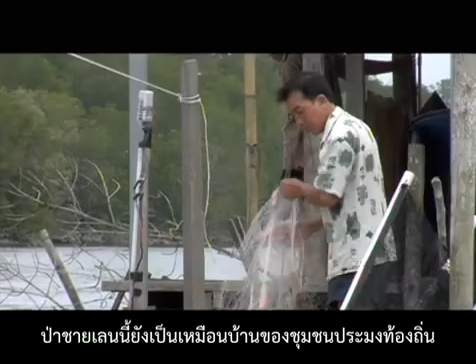Mukim Jimah, within the district of Port Dickson, is a rich mangrove growth that plays a vital role in supporting the coastal ecosystem that provides a natural habitat for many unique marine species, birds, and other wildlife. It is also home to local fishing communities, in which their livelihood is dependent on the sea.

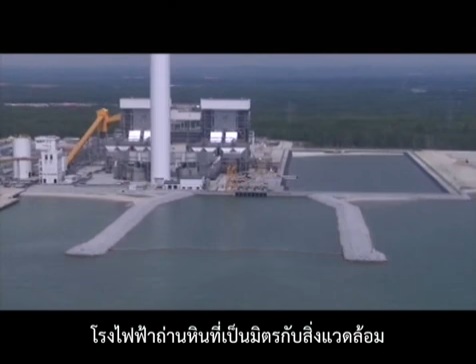Nestled amongst this natural wonder is a nature-friendly coal-fired power plant. The Jimah Energy Ventures power plant was constructed on a reclaimed island in effort to preserve and revitalize the 200 acres of mangrove-filled coast.

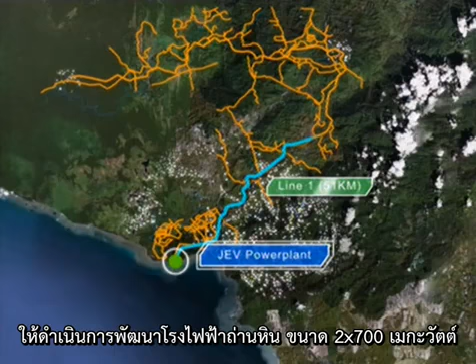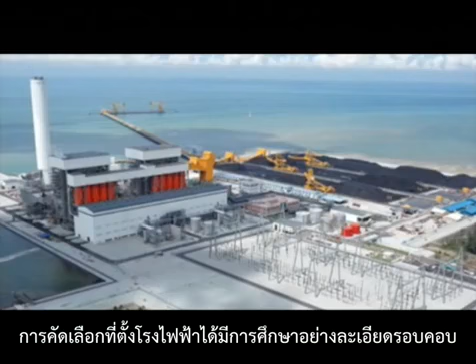In meeting the nation's electricity demands growth and fuel diversification policy, Jimah Energy Ventures, or called JEV, is entrusted by the Government of Malaysia to develop a 2 by 700 megawatt coal-fired power plant located near the load centre, Klang Valley. The site selection was subjected to serious study.

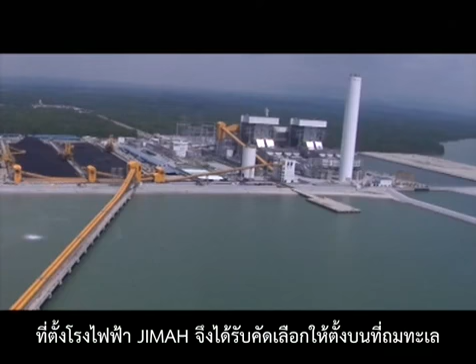Due to its requirements such as availability for an all-year-long coal shipment and abundant water supply for its cooling system, the Jimah site was selected. Having built the plant on reclaimed land minimizes the impact to its surrounding mangrove forest.

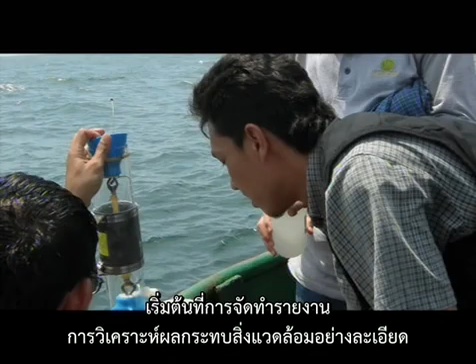Environmental impact studies were conducted with consideration of all possible outcomes that the power plant would have to the surrounding area. In effort to ensure that the power plant's existence is not detrimental to the environment, JEV's commitment in preserving the environment begins with a detailed environmental impact assessment study, which is approved by the Department of Environment and its panel of socio- and environmental experts on 31st January 2005.

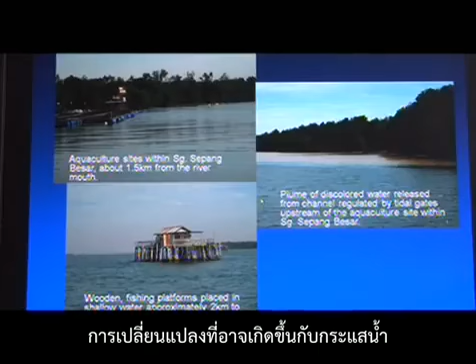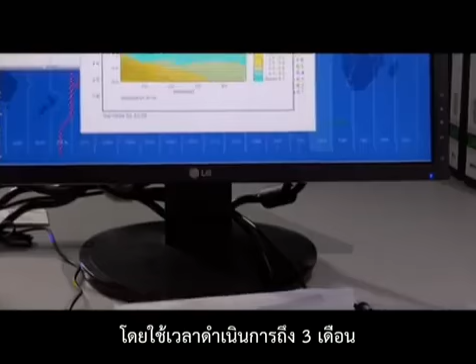Hydraulic studies were conducted to determine the possible changes that may occur on the water activity. By using 3D modeling, over 17 simulations were done to cater for the possible configurations, which took more than 3 months to generate. The thermal plume simulations were observed to identify the power plant's footprint, seawater intake, and outfall locations, to minimize changes in water temperature, wave activity, and future impact on the sedimentation.

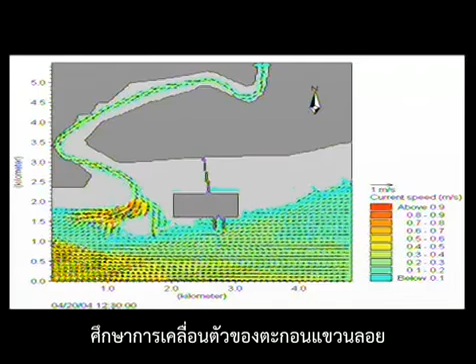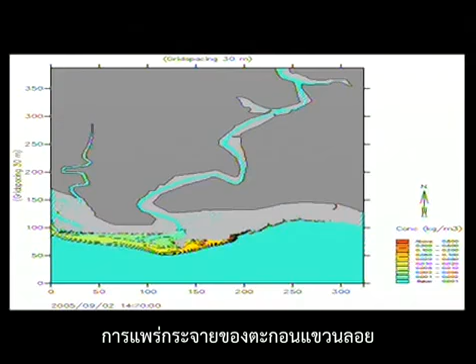The modeling results are divided into 5 different sections: hydrodynamic model, study of movement of suspended sediments, wave modeling, advection dispersion modeling, and erosion and accretion. The model identifies the relevant impacts such as coastal erosion, dispersion of suspended sediments, and the dispersion of thermal plumes. The outcome of the study plays a significant reference to the design of the plant.

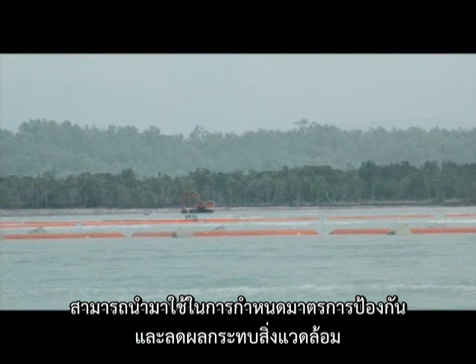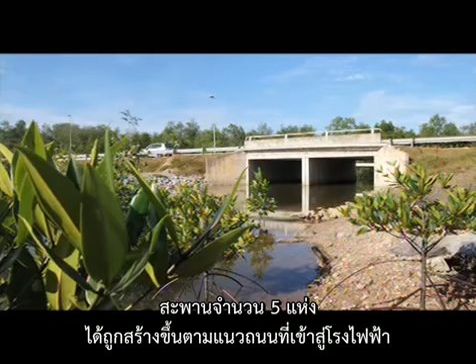From the simulated impacts, JEV can plan on the mitigation measures. The most crucial mitigation measure taken is to maintain the natural circulation of the mangrove swamp. 5 bridges were built along the access roads leading to the power plant to maintain the natural water paths to the mangrove forest, preserving its habitat.

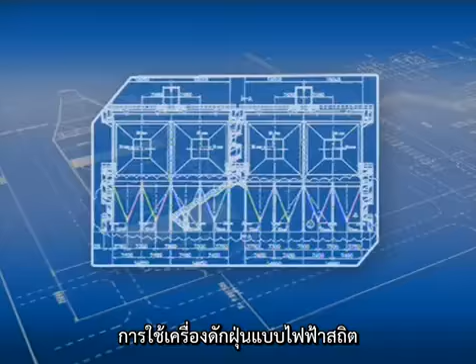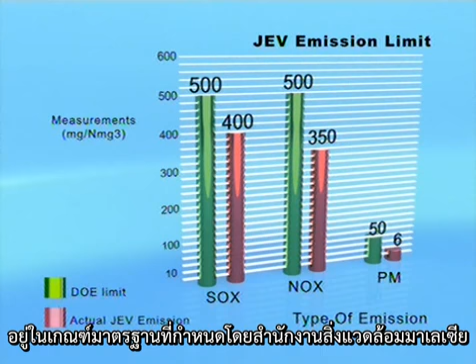Emission studies were conducted and a full evaluation was carried out to identify the potential impact that could occur. The use of electrostatic precipitator (ESP), flue gas desulfurization (FGD), and low NOx burner allows JEV to meet the sulfur oxides, nitrogen oxides, and particulate matters standard limits drawn by the Malaysian Department of Environment.

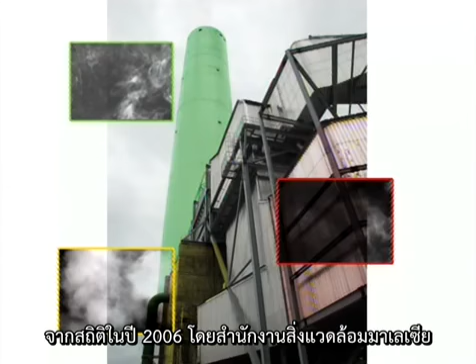The 2006 statistic by DOE confirms that the carbon monoxide produced by all power plants represents 1% of overall carbon monoxide emission produced in Malaysia. 98% is contributed from the transportation sector.

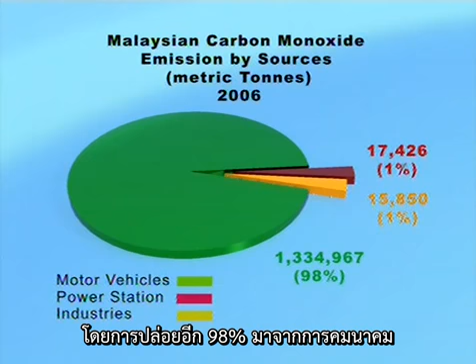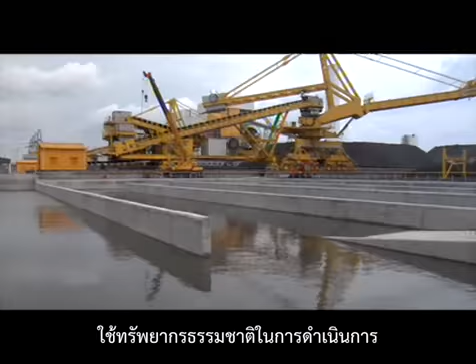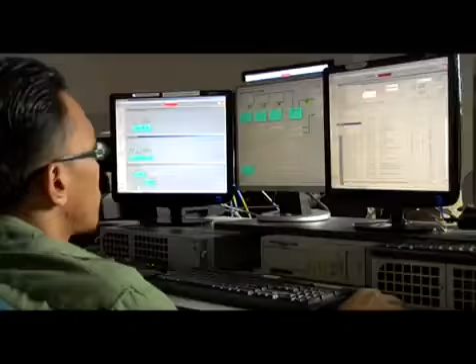JEV operates a productive and nature-friendly coal-fired power plant, using natural resources to operate, and carries out its environmental management plan for scheduled monitoring of the power plant's environmental impacts during construction and operational phases, ensuring that all the elements released back to nature do not harm the surrounding or affect the communities nearby.

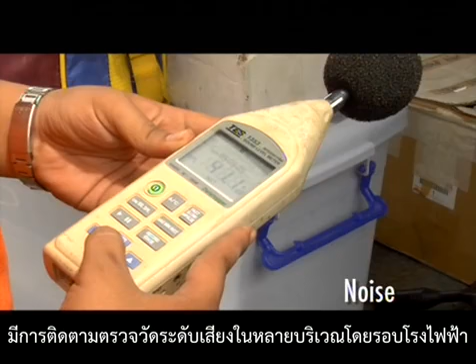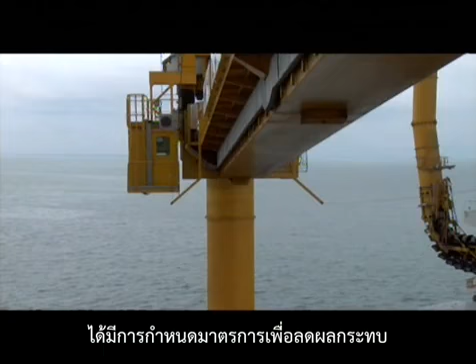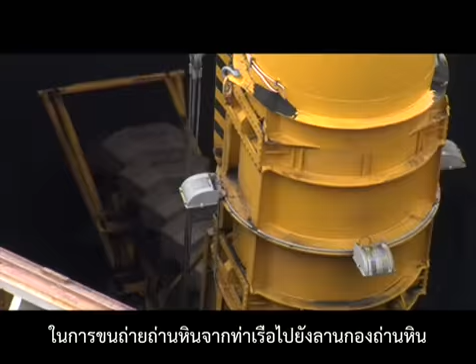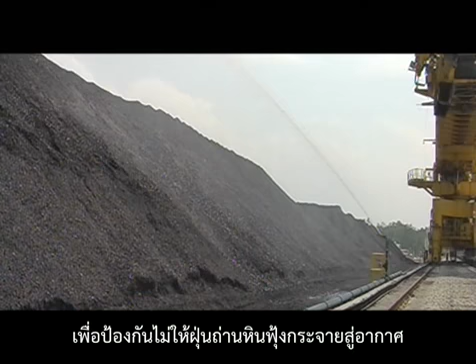Noise levels are monitored in various locations around the power plant to ensure that the noise produced remains within an allowable limit. Measures have been taken to minimize changes to the air quality at the coal handling facilities by having a covered coal conveyor for transporting the coal from the jetty to the coal yard, and also installing a dust suppression system to prevent the coal dust from escaping into the air, in addition to regular cleaning at the coal handling facilities.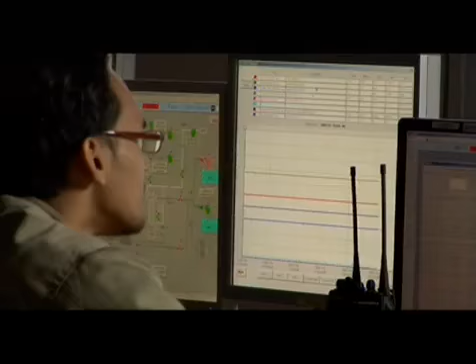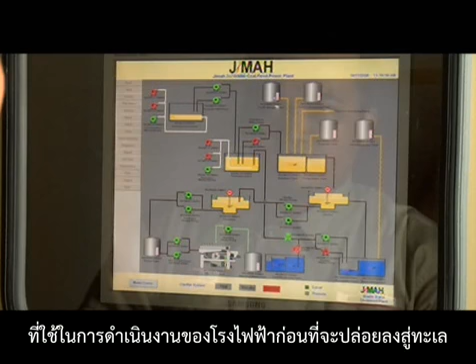Air quality samples are taken regularly in and around the power plant by JEV to monitor the level of air quality. In addition, an online monitoring of flue gas emission is linked directly to the Department of Environment. The pH level of the water used during the power plant operations is monitored and attuned accordingly before being discharged into the sea.

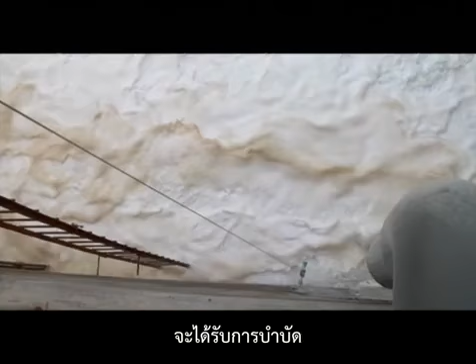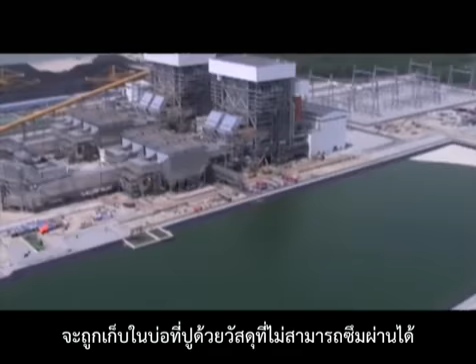Seawater used in the power plant's cooling system and flue gas emission filtering process is treated, and JEV monitors the water quality and the potential impacts resulting from warm water discharged back into the sea. Ash, the byproduct of coal combustion process, is kept in a pond lined with impermeable geotextile material to prevent the ash from seeping to the soil beneath.

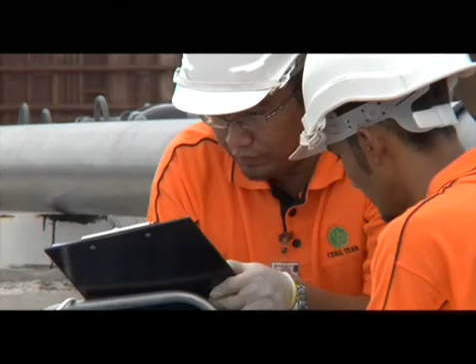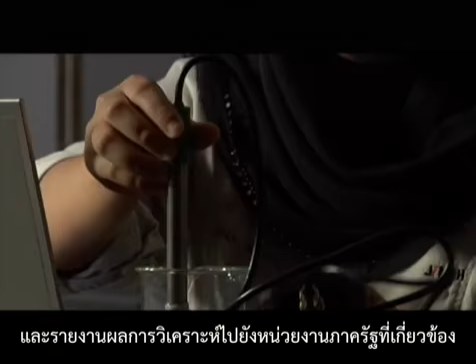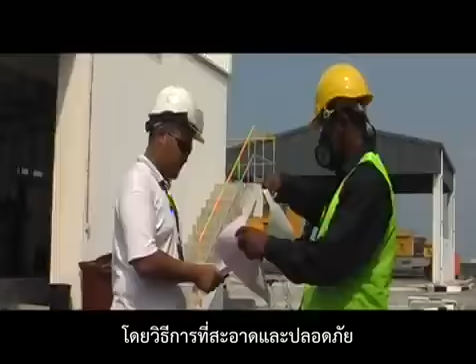Underground water samples are also checked regularly. All samples taken to the laboratory are analyzed by qualified technicians, and reports are submitted to the relevant government agencies. Waste produced is regularly transported to the disposal area by Kualiti Alam in the most clean and secure way to maintain and protect the environmental quality.

Mangroves have complex and remarkable root systems that resist soil erosion by helping to bind the shore together. To improve the current condition of the surrounding mangrove forest, mangrove replanting activities are being carried out by JEV in accordance to experts' recommendation in the mangrove growth studies. Approximately 20,000 trees have been replanted, and collaborations with relevant government agencies are in place for a successful mangrove replanting exercise.

Through all the environmental management plans, the power plant is infused with nature and its elements. As a friend of nature, nature and its best elements in Jimah have given JEV the natural resources required for the power plant. JEV will continue to play its part in respecting and existing with nature and communities around it by preserving and protecting sustainable development.